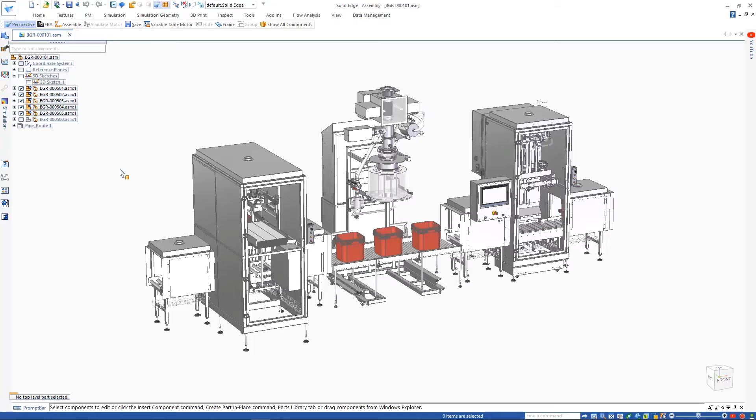Accelerate the speed of simulation studies with automated processes that validate design performance. Solid Edge simulation capabilities provide design engineers with powerful tools to help digitally validate their designs and build better products in less time by front-loading the simulation process.

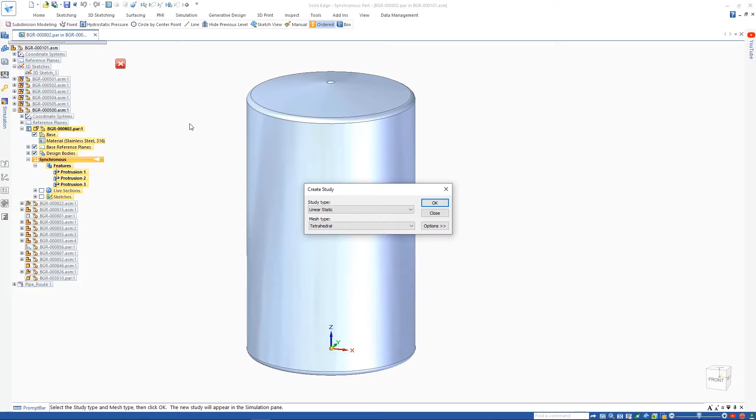Solid Edge simulation can calculate hydrostatic pressure loads in a linear static or coupled study. This can be used to determine the maximum and minimum pressure that is exerted by a fluid from a given point due to gravity. Running such a study on this tank for a dosing assembly line, we simply need to

select the faces the load will be applied to, define a height for the fluid in the tank, and define the material density. In this case, we'll also apply a fixed boundary condition to the bottom of the tank, then mesh and solve the simulation.

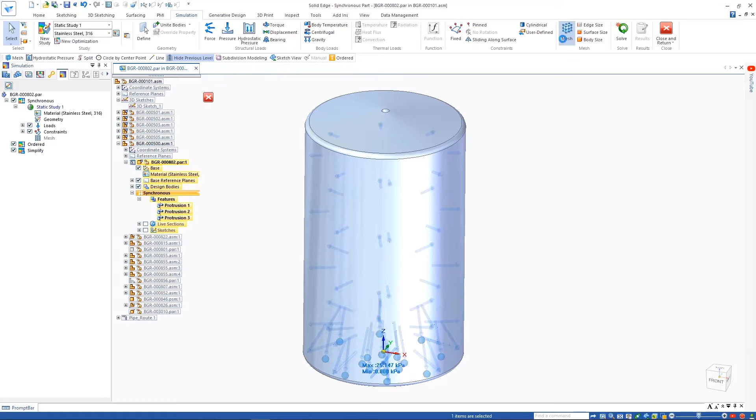Here we have a new body mesh option, a new Siemens mesh technology that simplifies and improves the tetrahedral mesh for complex parts with intricate bodies and automatically cleans up small faces and edges.

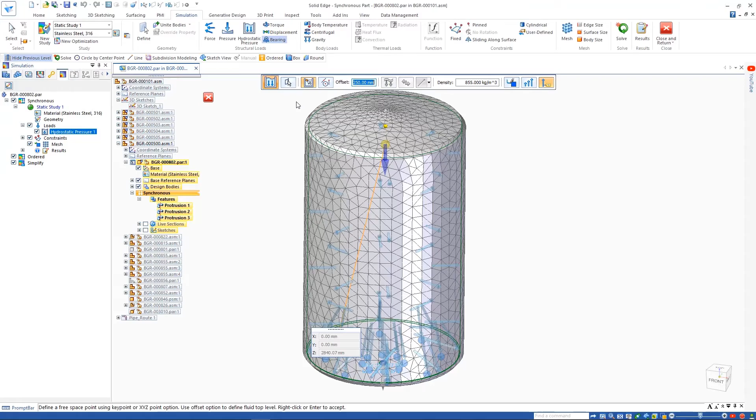Viewing the results, we can see the areas of higher stress at the bottom of the tank and lower stress at the top. The maximum stress value is nowhere near the yield stress, so the thickness of our tank is more than adequate for the job.

Adjusting the level of the material in the tank is as simple as editing the hydrostatic pressure load and selecting a new reference point, or simply adjusting the offset value. Solving the study again allows us to see the differences in pressure that the lower fluid level has on the tank. Next, we'll look at some of the enhancements to simulation studies of structural frame models.

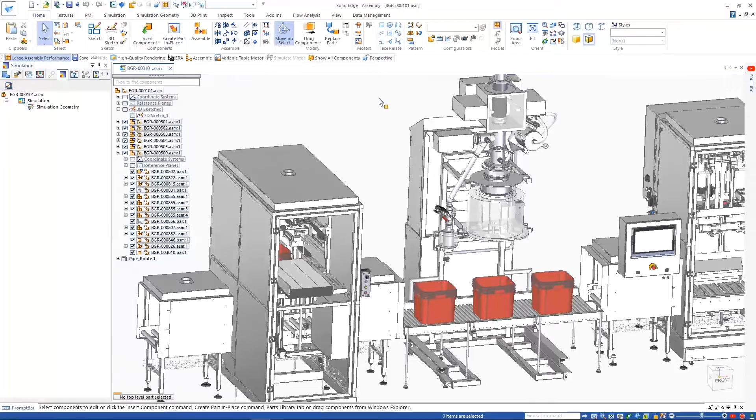As we define this study, we can see that automatic link creation now considers all cases where rigid links need to be created and only creates those needed for the study. We can adjust the connector option to specify a maximum rigid link length to automatically create links, or, as we'll do here, we can use the automatic link command, which enables the model to be set up far more quickly.

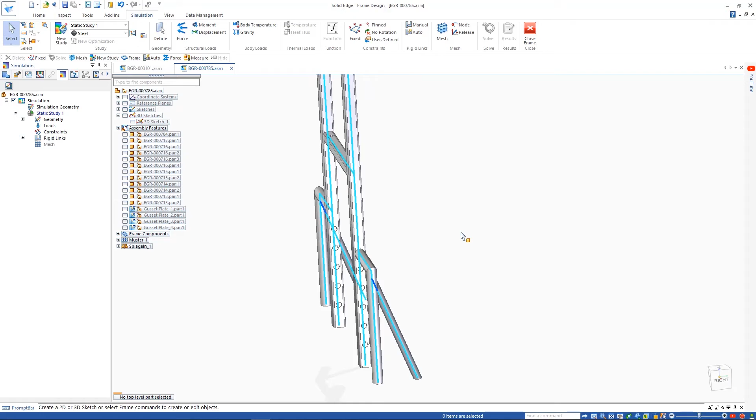We'll go ahead and apply a fixed constraint to the bottom of the structural frame and define a force to the top two horizontal beams, then solve the study to see the results.

Another new feature for Solid Edge simulation is the ability to view beam von Mises stress plots for frame models. Factor of safety plots have been enhanced and are now based on the von Mises stress, producing far more accurate results than the maximum combined stress results that were used previously.

Switching back to the main assembly, we can see there are some pins holding the dosing mechanism in place. Opening one reveals that it's a mesh body. Solid Edge simulation can now validate mesh models resulting from a 3D scan or generative study. Here we can see the results of an existing linear static study.

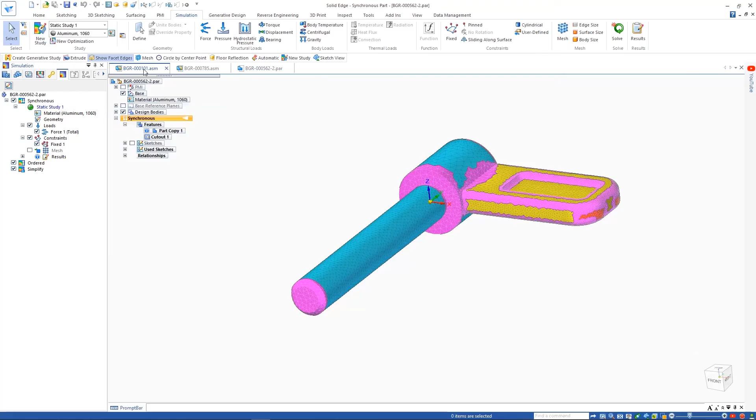Being able to create the simulation mesh right on top of an existing mesh body truly sets Solid Edge apart. There's no reverse engineering or any other complex procedure required.

Simulation-driven design helps designers get immediate feedback on design performance by embedding simulation into the CAD environment and designers' processes. Simulation display performance optimizes load times for results data, making Solid Edge simulation faster than ever before.